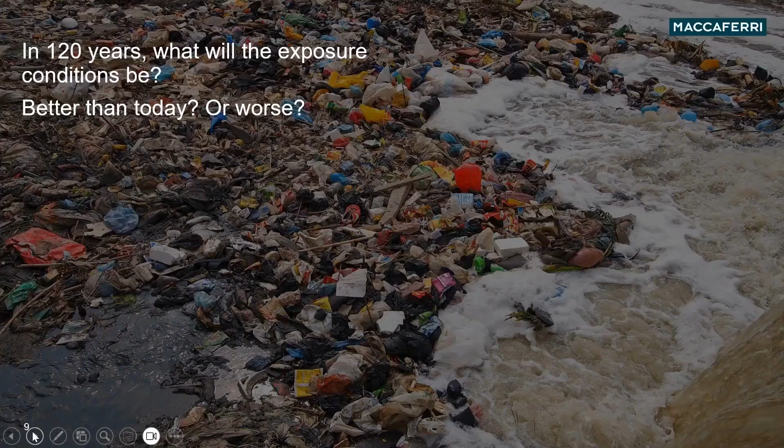In 120 years from now, what will the exposure conditions be? Will they be better or worse? We have so many situations and changes around us, and we can expect these conditions, either good or worse, will definitely not be the same.

So do we consider this uncertainty in our design? Do we select products and applications that are more durable, which will reduce current risk and also keep in mind future prospects that might come? With the growing changes, there is an increasing need for a highly robust solution to address the worsening, changing climate and changing operating conditions faced by all structures.

There is significant demand on our woven wire mesh solutions, the double twist mesh, today from the increasingly aggressive and highly abrasive working environments in which these materials and products are used.

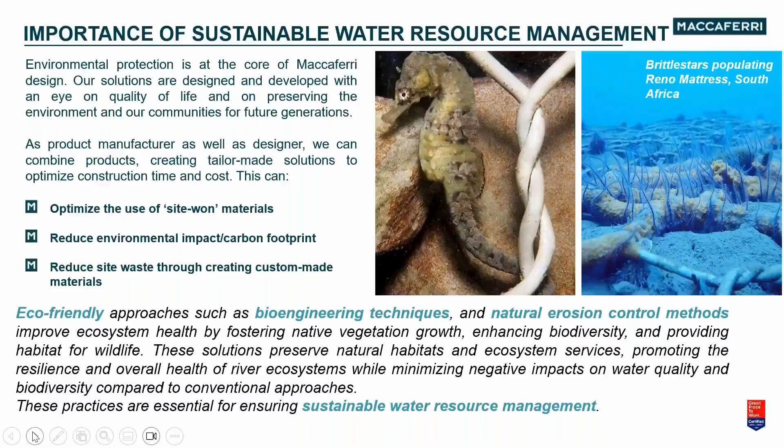So I will quickly move on to the presentation. All these activities, all the discussions that we undertake today and across various forums that Maccaferri engages through, the objective is to have sustainable infrastructure management, and in today's case, sustainable water resource management.

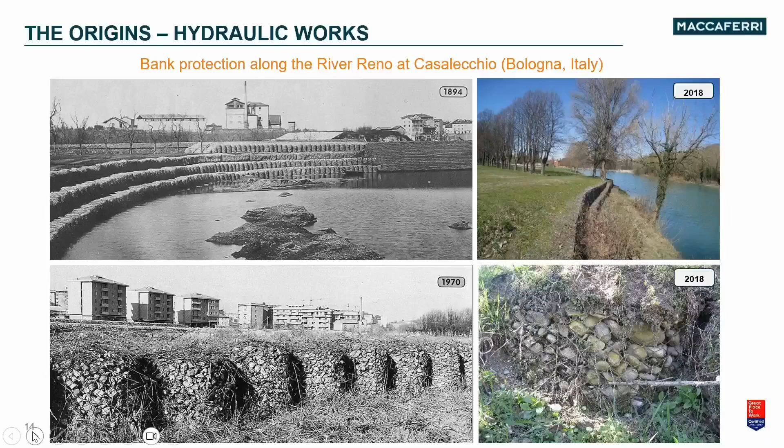A little bit about the history. As my colleague explained, we are a 140-year-old organization, and here you can see a project undertaken at the turn of the last century that is still standing strong - the bank protection work we undertook at River Reno in Italy. You can see the pictures at various timelines from 1894 to 1970 to as recent as 2018.

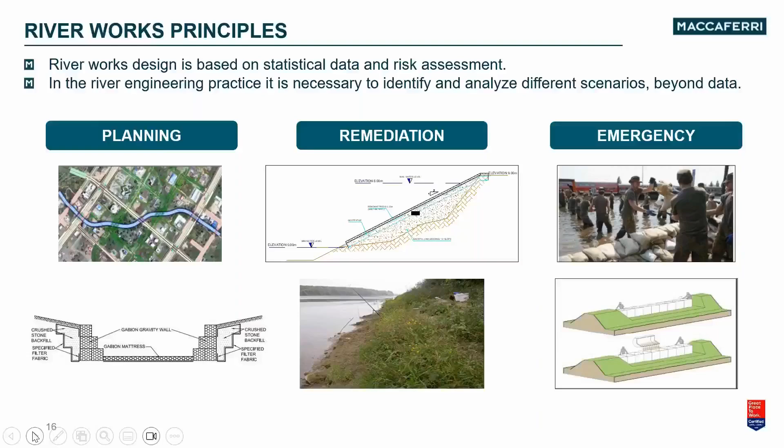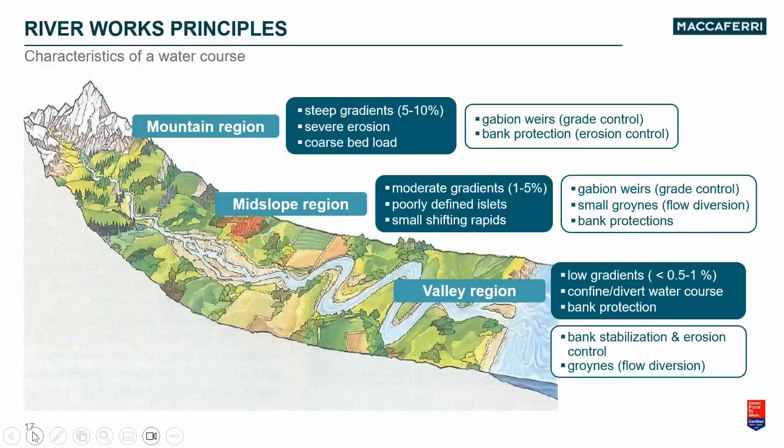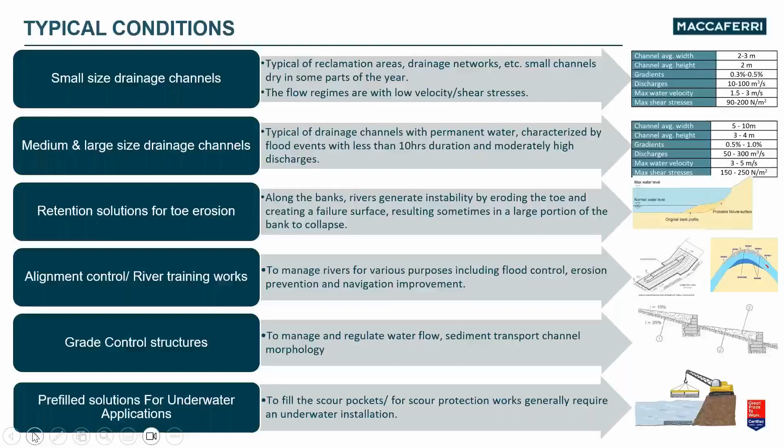So now a few latest innovations, a few new benchmarks that Maccaferri has brought to the market. As leaders, as innovators, it is our responsibility to continuously innovate, to continuously improve the existing solutions, because the products, the applications which fit the bill today or a decade ago might not fit the bill as soon as tomorrow. So a little brief about our latest innovations.

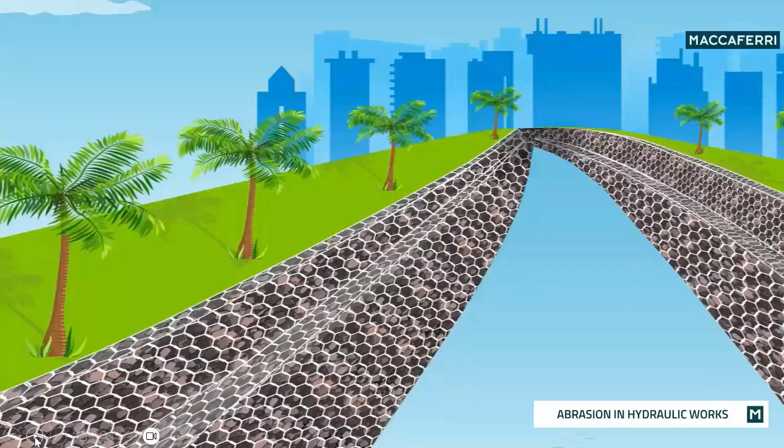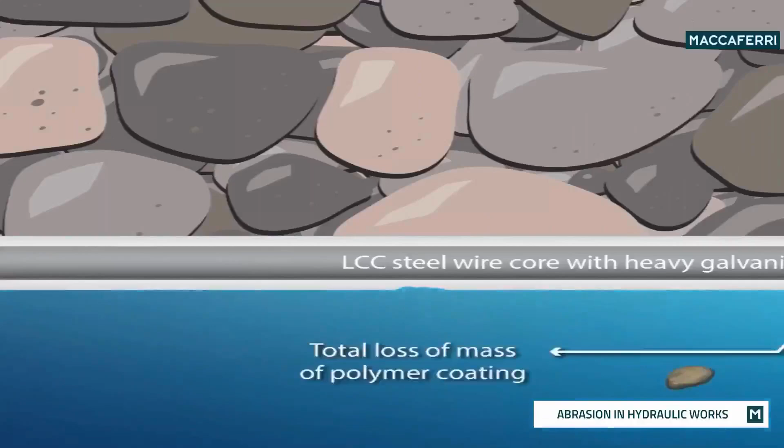This is a small video which shows how abrasion in certain hydraulic works and hydraulic structures happens. As you can see, all along the river bodies we have these Gabion enclosed mattresses, weirs, and various structures. When the water and sediments flow in these channels, they continuously erode the coating of polymer, which in turn exposes the steel mesh. So this is a very common and regular phenomena, but as we know, conditions get more and more aggressive. How do we cater to this loss?

How do we improve our coating? In this scenario, our advanced polymeric coating, PoliMac, comes into the picture. This can be used for all double twist products, be it gabions, be it mattresses, be it our hybrid retaining structures like the Terramesh and Green Terramesh. This advanced polymeric coating can be used for the entire double twist portfolio.

And how is it better than the conventional PVC coating? It has 10 times more abrasion resistance. So when these structures are exposed to higher velocities, higher particles moving in the water bodies, they are able to resist 10 times more than a normal PVC coated double twist structure.

It also has higher resistance to low temperatures. When we are doing installations in the higher reaches of the Himalayas, where even the variation in temperature due to seasonality is very high, they perform excellently. There's also a much higher, 4 times higher, UV resistance, because most of our structures across a larger period of the year are exposed to UV rays. So they have 4 times more higher UV resistance.

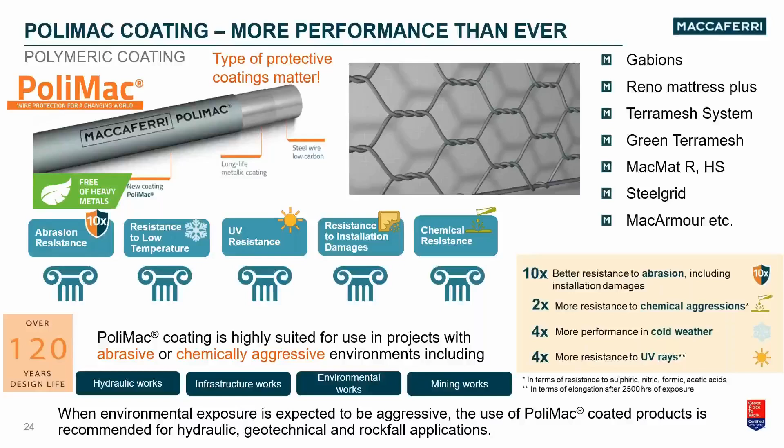And since they have higher abrasion resistance, when we are installing these structures and dumping or placing stones, because of their higher abrasive properties, they are able to tackle the damages with much higher performance as compared to the conventional coatings. So this is how Maccaferri is continuously improving its own solutions for the overall benefit of the market and the environment.

And the great thing about PoliMac is it is not just suitable for aggressive environments to cater to higher needs, but because it is free of heavy metals, it does not release any polluting substances into these ecologically sensitive areas, allowing the integration of live species in these ecological situations with the applications that are placed.

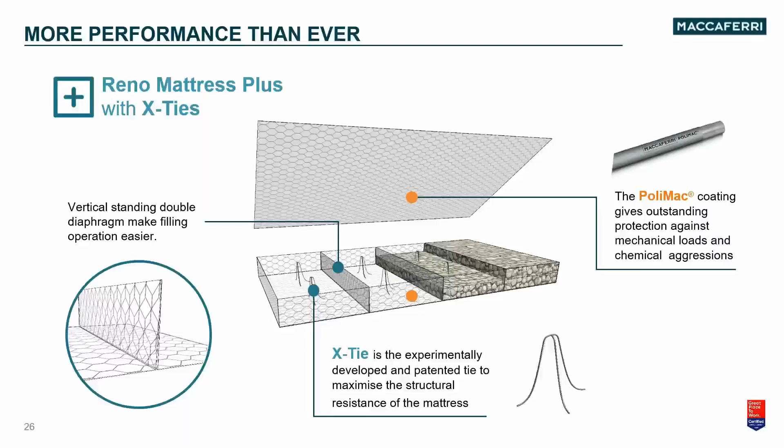Moving on, another unique application that Maccaferri has devised is the Reno mattress, the Reno Mattress Plus. Taking a lead from our conventional Gabion mattresses, we have been able to develop a more concise, more confined mattress by allowing double diaphragms as separations and also X ties, which are able to enclose the mattress more tightly, and the whole mesh is coated with polymer. This basically allows for a lesser number of stones for the same purpose.

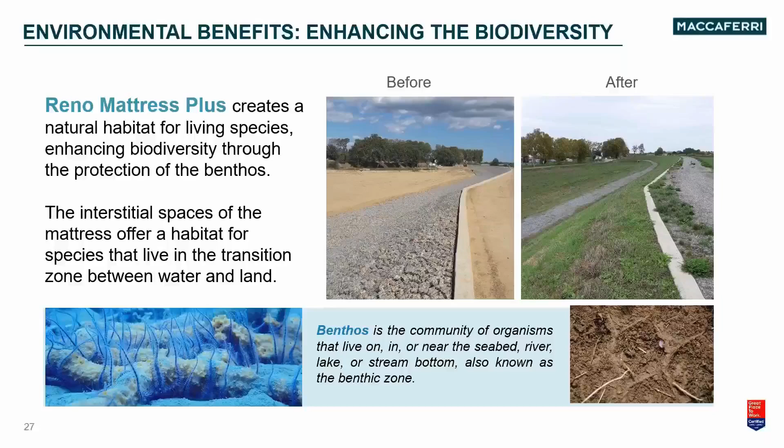A little brief on the environmental benefits also because of this. As I was mentioning, the polymer coating is highly inert, doesn't interfere with the local ecology. As you can see, when the mattress is applied on any slopes or on river training works, after a few seasons nature takes its role. As you can see in the before and after, it is ecologically more sound, giving a much more natural outlook. We will not even see that any physical intervention has been undertaken.

But how is the mattress better compared to the conventional stone pitching, the riprap solution, or the commonly used Gabion mattresses? If we talk about environmental benefit to start with, we will touch upon the economical benefits in the subsequent slides. The emissions are 82% less for the same shear stress, for the same flow we are designing, as compared to conventional stone pitching. This is due to a very simple fact: immense reduction in natural resources. If I am to quarry for a 100-meter stretch of a river length, the amount of stones would be considerably less when I am doing the same solution using the Reno mattress plus.

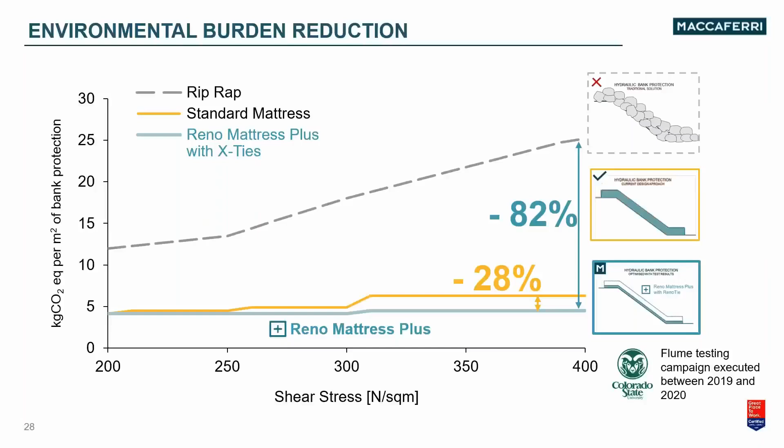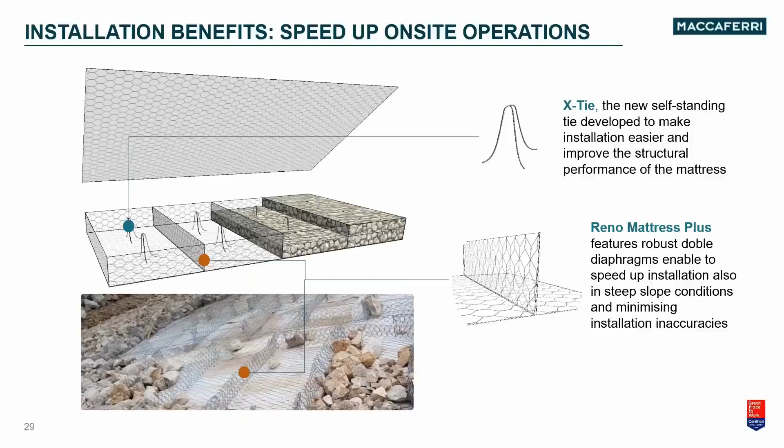What are the benefits? These are certain indirect benefits. Because the size of the mattress is more confined, the structure is more robust, there is a much higher speed of installation. Reduced stones would mean for the same linear length, I can achieve a higher speed for the project.

Moving on, a few sustainable structures that can be done for riverbank protection.

Am I audible? Sumit, can you just confirm? Yes sir, you're audible, it's clear. Great.

So moving on, for smaller size drainage channels where the protection work is of a less intrusive nature, we have our MacMat R, which is a geosynthetic mat. It is a geomat reinforced with our double twist wire mesh, which allows for protection on slopes and allows for growth of vegetation within days and weeks.

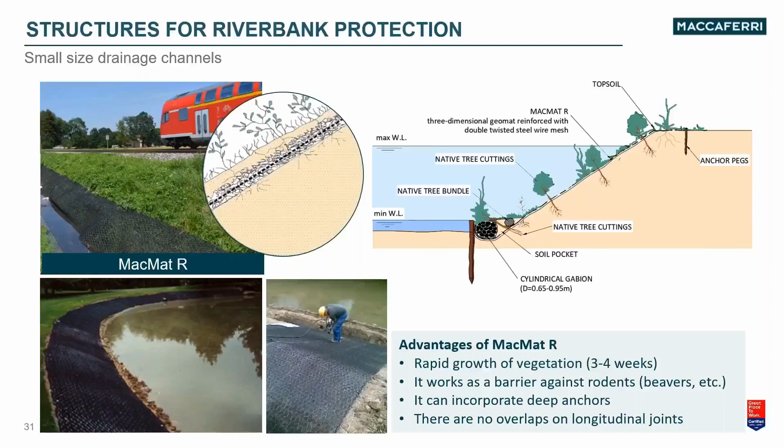And this, after a couple of seasons, as shown in the previous pictures, gets completely covered by natural vegetation, allowing for a complete natural fascia. We will not even see what physical intrusion has been made, rather than going for conventional stone pitchings, concrete linings, and so on.

When dealing with slightly medium or larger channels, our mattresses and the newly conceived Reno Mattress Plus come into picture. These are basically stone-filled mattresses ranging in thickness from 0.3 meters to as low as 0.17 meters, which showcases the immense benefit in terms of cost it brings.

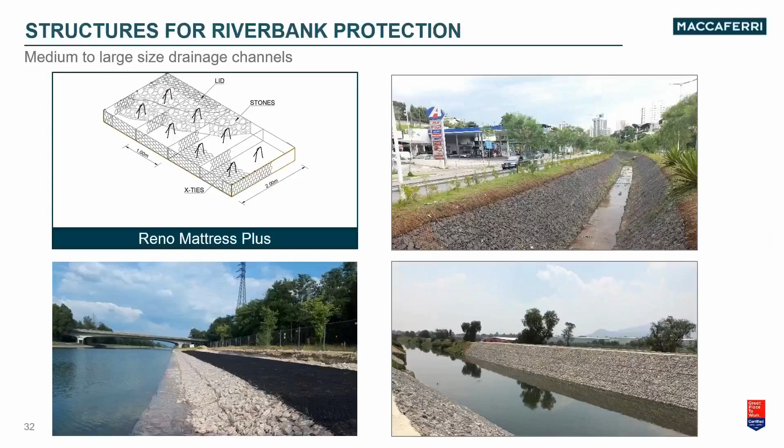When we are doing deep erosions, structures where the erosion problem and retention problem are really high, we have our family of retention solutions: the TerraMesh systems, our time-tested Gabions, and again the Reno Mattress Plus. All these solutions can be used together depending upon the local problem and the situation that has to be catered to.

For example, in the bottom right picture, you can see a combination of our retention system using Gabions, and to protect against any scouring, we have made a launch apron using our mattresses. This is just a generic scheme; depending upon the situation and problem at hand, we can devise the solution using the large portfolio of systems we have.

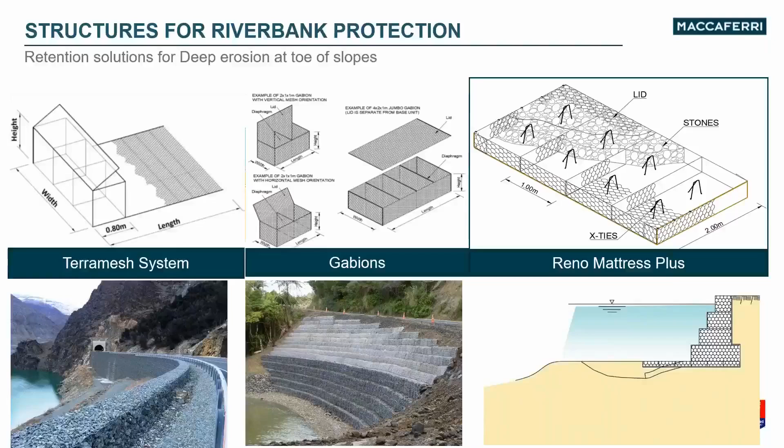As I was earlier mentioning in the initial slides, when we are to align and control the river, we can create groins, use channels to basically control the flow and gradient of the river. These are a few depictions of the same.

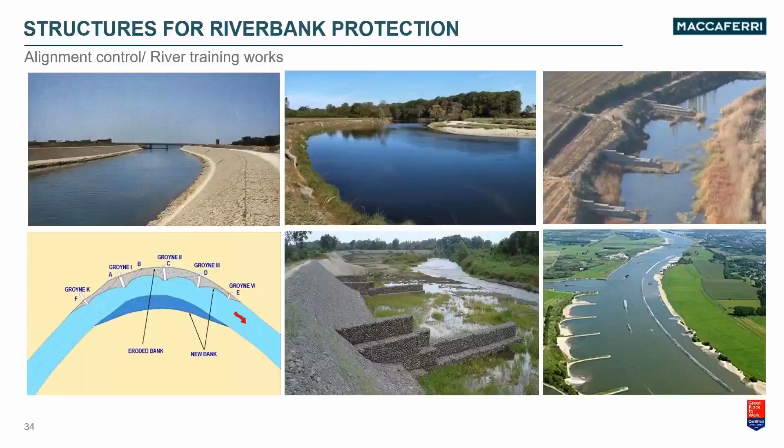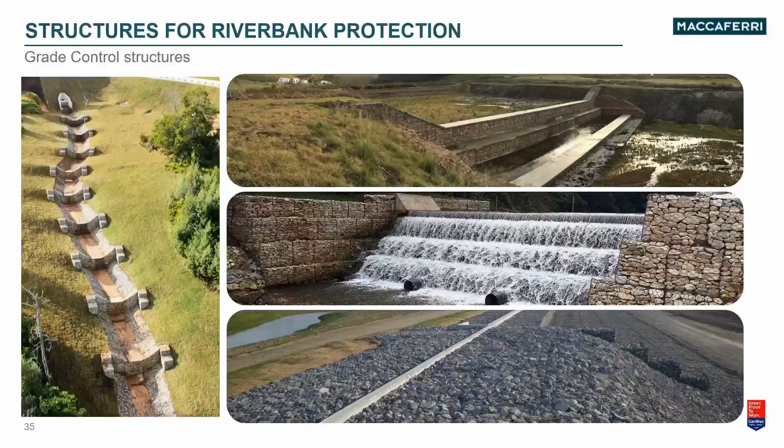Again, if we are to control the grade and ensure that in steeper grades we are able to make physical intervention, it can be done through our gabions and our retaining structures. This is a beautiful depiction of the same.

Moving on to underwater applications. In certain seasons, especially the current season of high monsoons, if work has to be undertaken that cannot be done through conventional stone-filled gabions, there is no feasibility to install the gabions because of high flood levels.

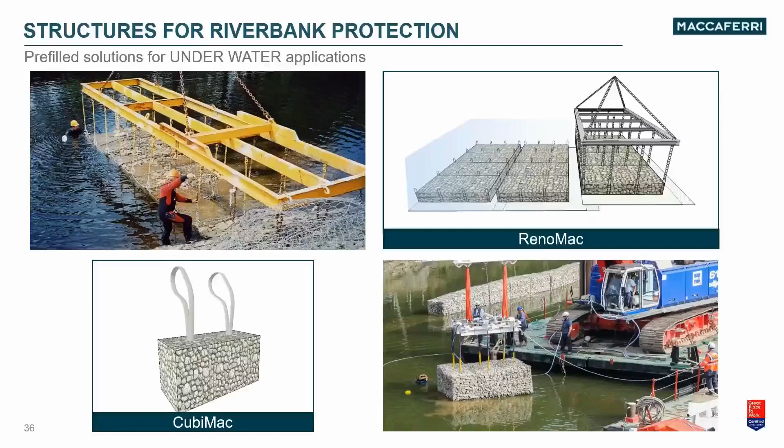We have our RenoMac and CubiMac. These are pre-filled gabion structures. The gabions are pre-filled on the banks, put on barges, and can be easily lifted and placed through our team of specialized divers at the right location, and the work can keep moving at great speed. So it allows the work to continue, and we have ways and means to not only design but also to install as well.

Moving on to a very important question: what are the benefits of all these great applications? What are the economical differences? What are the cost benefits of these solutions? Is it that all these solutions are highly expensive and not viable? Absolutely not. These solutions are not only environmentally beneficial, but economically sound as compared to conventional and existing solutions.

But when we discuss the advantages of all these new approaches, let's ask how much does a bank protection work cost? We take into account the cost of designing, the cost of materials, the cost of execution works, the raw materials, the maintenance charges, etc. That is why when we look at the purchase price of these products, it is not the only part we end up spending.

The total cost of ownership includes the purchase price of these products as well as the appurtenant works, the cost of raw material, the cost of installation, the cost of labor, what the maintenance cost would be if I go ahead with conventional solutions, and what the medium to large maintenance periods would be. Through these innovative solutions, when less material is used, lesser steel, lesser stone, means higher savings. That's a direct cost benefit.

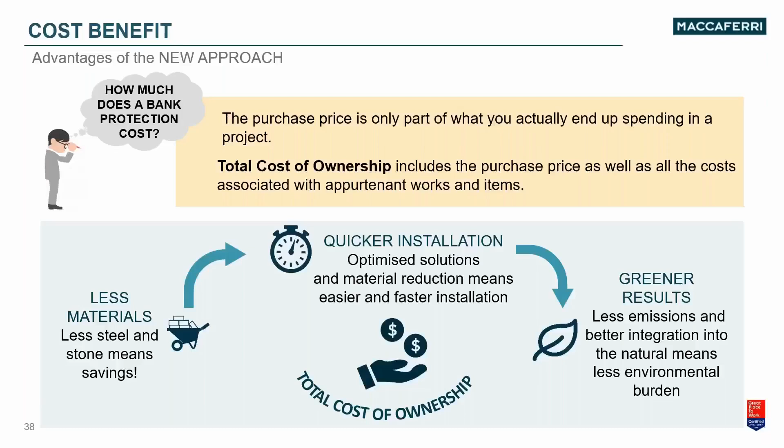These are green solutions because the resources that are to be used are much, much lesser. There is a lot less burden on our fragile environment when we undertake development using these solutions.

Our solutions are not only theoretically made, but have undergone elaborate laboratory and field tests. For our Reno Mattress Plus, we undertook an elaborate 3-year testing campaign with Colorado State University, with a huge R&D investment. This resulted in showcasing that it is 70 to 73% more effective for a similar design and situation compared to conventional solutions like riprap, stone pitching, and others.

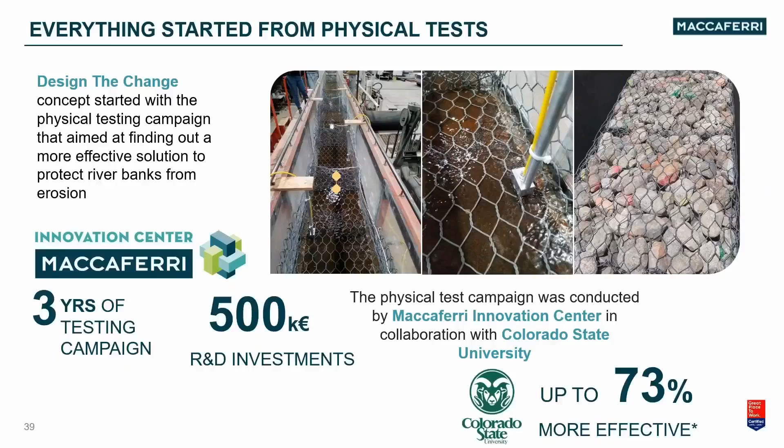Moving on to the cost benefits — these are absolute direct benefits our solutions bring to the table for customers. Taking into consideration the comparison of Reno Mattress Plus versus the conventional solution: compared with traditional riprap for the same shear stress, there is more than 70% reduction in thickness, a direct cost saving in raw material. Even compared with conventional double twist mattresses of higher thickness, half a meter or so, a 50% reduction can be achieved using our unique Reno Mattress Plus solution.

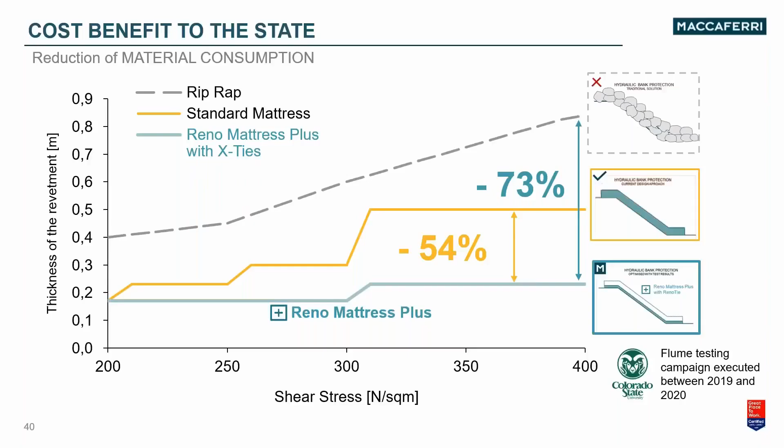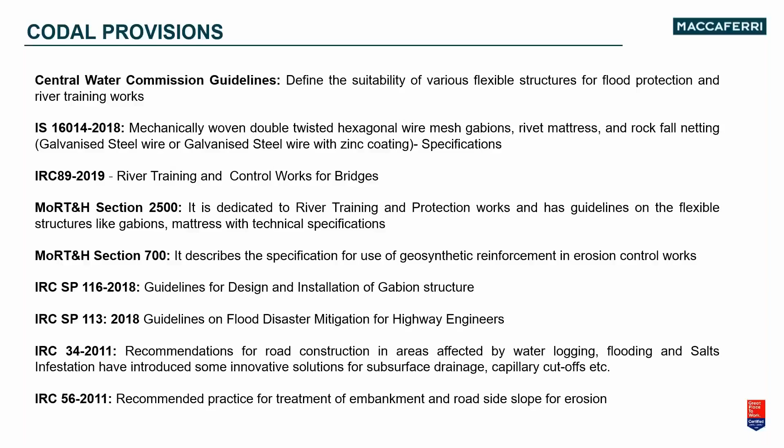What is our response to these challenges? Are they briefed in certain codal guidelines? Are the design parameters included in published guidelines? 100%. From the CWC guidelines to IS 16014, various IRC SPs, and MORTH guidelines, from product to design, our solutions are listed, generic, and out there for the market to use and improve the efficiency of their projects.

Now moving on to a few case studies. Whatever has been briefed till now is covered in these case studies — it's not all show but also go. We not only develop products, we execute projects as well. I will take you through a few beautiful, iconic India-centric case studies undertaken over the last couple of decades by Maccaferri, in partnership with various executing and regulatory agencies.

Starting off with a great project in Guwahati, Assam, where we were able to retain the entire bank using our hybrid green Terramesh, our high strength geogrid, and our textiles.

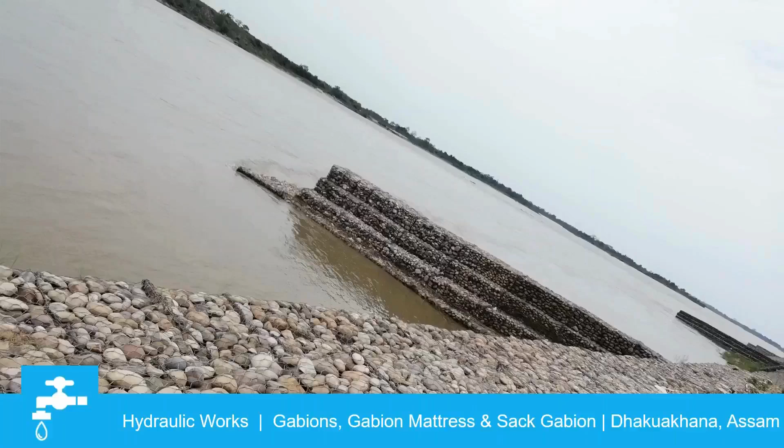Another project in Assam for river training works, using gabions, mattresses, and sack gabions in submerged conditions.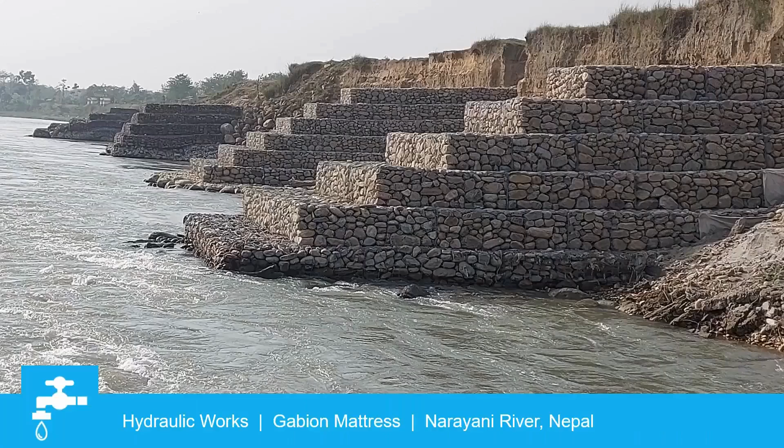Again, a project in Nepal, we were making these groins and mattresses, and you can see the whole project has come out beautifully. Another project in Nepal at the Bagmati River, where we were channelizing the river, providing erosion control along the banks using our double twist Gabion.

For people staying in the Delhi NCR, most of us cross the Delhi-Noida bridge pretty much every day. This involved protection of the weirs and providing bank protection using our Gabion mattresses. This was done more than a decade and a half ago.

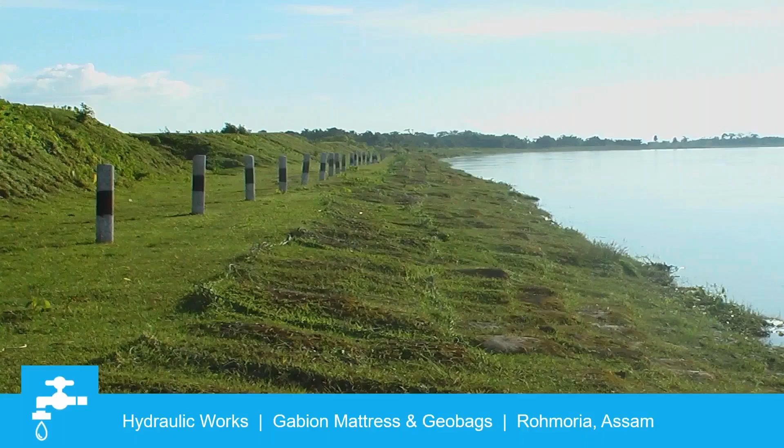Another nice project at the Rohmoria in Assam, along the Brahmaputra River, where our Gabion mattresses were filled with locally available material, encapsulated in geobags. In this image, the product itself is not visible because nature has beautifully covered and incorporated the solution into its own growth. As you can see, it's a beautiful green solution and provides great erosion control on the very difficult Brahmaputra River.

Another iconic and very recent project that we have done is the erstwhile Khidkiya Ghat in the Honorable Prime Minister's constituency of Varanasi, which has now been rechristened the Namo Ghat. Using a combination of our mattresses and hybrid Terrameshes, we were able to do great bank protection work, which not only protects against erosion but is also now a tourist destination in Varanasi.

For a project in Paradeep in Odisha, again protecting against the very difficult Mahanadi river, we have our Reno mattress. As you can see by the timeline mentioned, this project was executed 12 years ago, and it is performing beautifully.

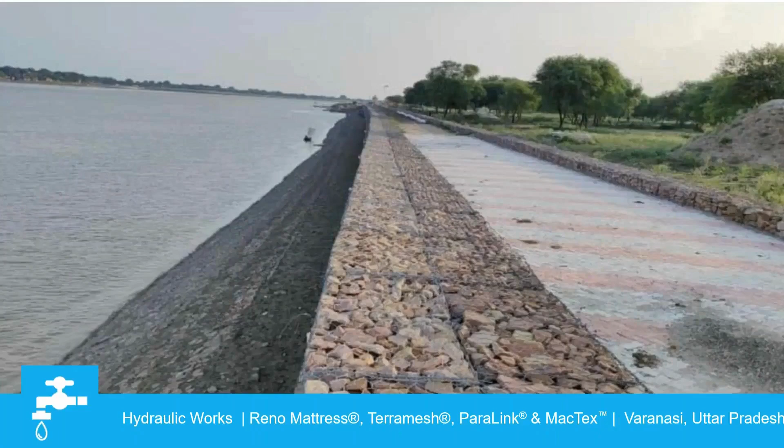A project up north at the Joshiara barrage using our Reno mattress. And again in Varanasi, providing bank protection and protection against erosion using a combination of mattresses, Terramesh, and our high strength geogrids.

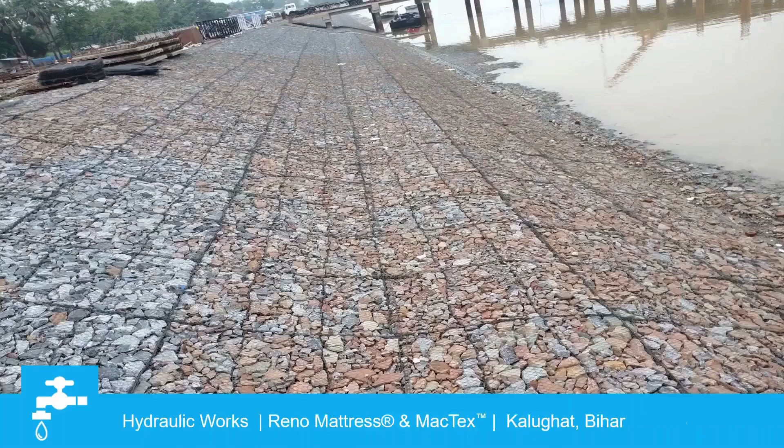Lastly, a project in Bihar where you can see the bank protection works have been undertaken using our mattress and geotextile. This is a similar project in Patna.

Lastly, a few key takeaways. How do we design our solutions? How do we incorporate our products in the works? Through our unique, innovative, and open-to-all design softwares.

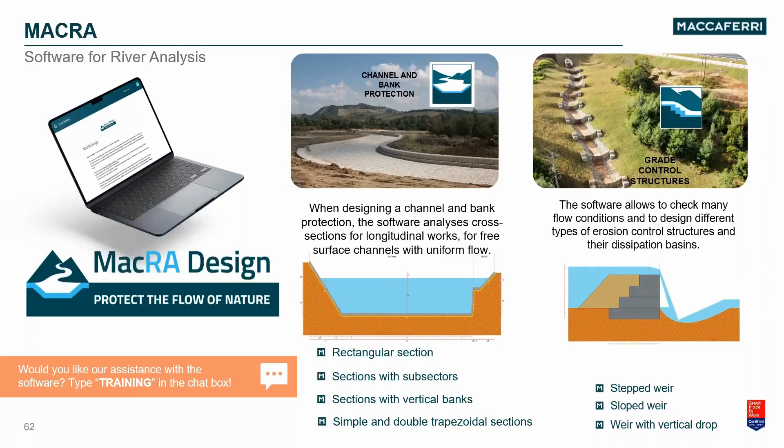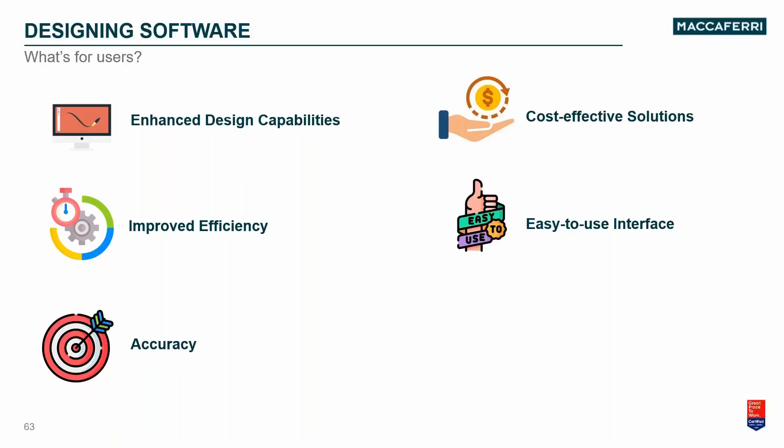And what benefits do these softwares allow? They have enhanced design capabilities. They allow for incorporating cost-effective solutions. They increase efficiency, have a very easy to use interface, and are highly accurate, taking into note both the local and the global failure scenarios. So, highly accurate.

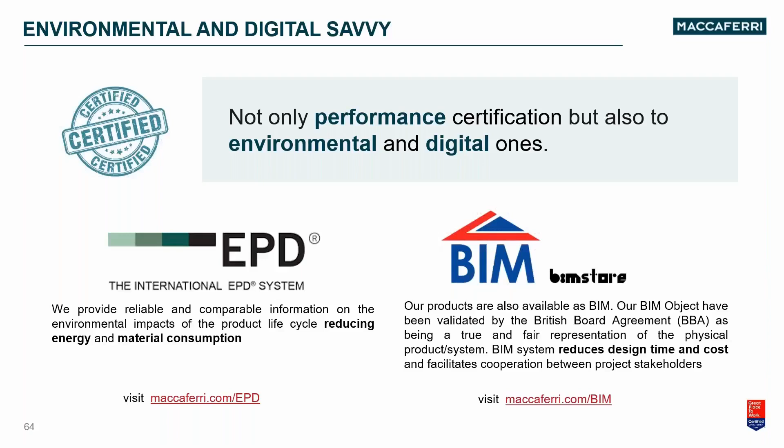And we are not only performance certified, but we also promote environmental and digital certifications. As you can see, we are EPD and BIM certified, and you can visit these respective links to view the same.

Lastly, as we are on board with the Honorable Government's vision for a net zero emission country, and we want to contribute to the United Nations Sustainable Development Goals, we want to promote solutions which are not only innovative and beneficial for civil engineering applications, but also reduce the burden on our fragile environment.

Lastly, a few key takeaways. Sustainable water resource management is very crucial to the quality of life and ensuring we are able to preserve the environment for our future generations. As we mentioned about the advanced PoliMac coating on our wire mesh products, it allows for higher sustainability and use in more difficult situations.

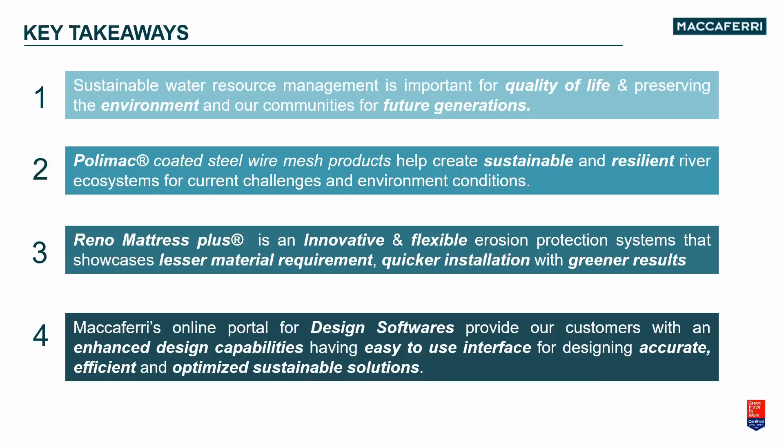We briefed you about the Reno Mattress Plus, which is an innovative, flexible erosion protection system that not only allows for quicker installation but also allows for much lesser use of raw material for the said application. And lastly, our online portal and design softwares are free for use, available for the industry, our colleagues, our peers, and we are here to help one and all learn how to interface with these softwares.